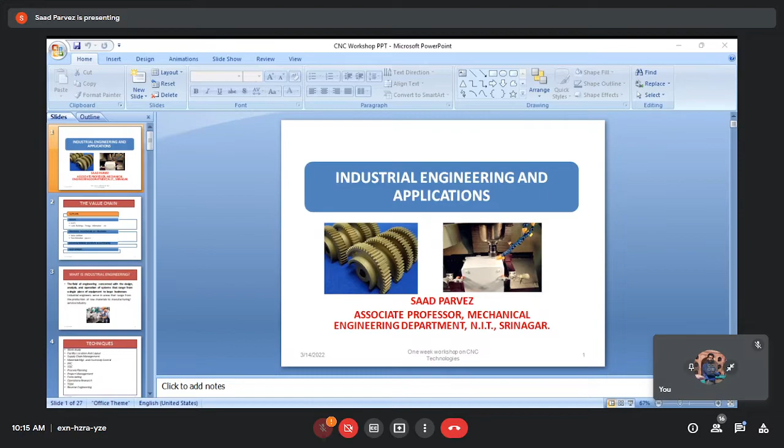More or less, they have an influence on the industry, and industry-institute relationship is very, very important. In India also, now we have found for the last few years that academia cannot survive without an industry, and industrial development, the technological development, the research which generally the students do, it should influence the industry. It should help in building up the technologies which are to be used or which are being used by the industries.

Similarly, CNC machining, when we talk about this technology, it can fix many issues in production that cannot be solved by other processes. I think much has been told about it by the earlier resource people, the experts of the CNC machines.

Usually, precision metal parts are CNC machined, even in the first stage with mold. It will also be machined after molding. So after molding also machining is required, after casting also machining is required. Those of you who have been exposed to industries will find the relevance of machining in manufacturing. It is very prevalent. We cannot talk about producing a product generally without machining it on some machine tools, on some machine facilities. So CNC is the machine which is used throughout the industries in today's era.

Why do we use CNC technology? What is the benefit? The basic answer to that question is, after molding, we have a lot of roughness. So to achieve a smooth finish, to obtain precision, molded metal parts are quite rough. So we need to obtain certain precision values, and CNCs turn out to be one of the best facilities for achieving that, no matter if sand casting molds or die castings are used.

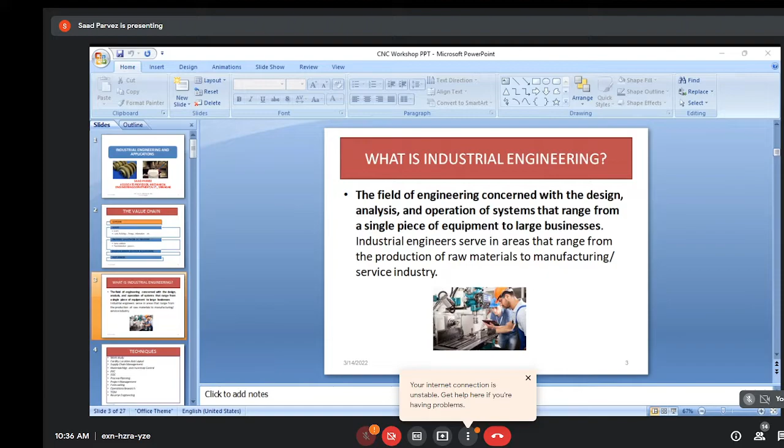These factors affect each other, resulting in CNC machine tools in the production process which cannot completely rely on the workmanship of a person who is working there. So other systems have to play their important role. That's why we talk about industrial engineering.

So what is industrial engineering basically? Industrial engineering is a field of engineering concerned with three important parameters: design, installation, and improvement of man, machine, and materials. It's concerned with the integration of all the resources which we are using in an enterprise, especially the 5 M's or 6 M's, and these resources need to be integrated.

Industrial engineering is an applied science used for the integration of all the resources to manage our businesses. Whether we talk about a small piece of equipment or a large business, there is a role of industrial engineering in cost reduction, number one. Number two is the increase in productivity. Number three is the effective utilization of resources, because resources are scarce. And number four is designing a man-machine system ergonomically. These are the broad four important aspects of industrial engineering.

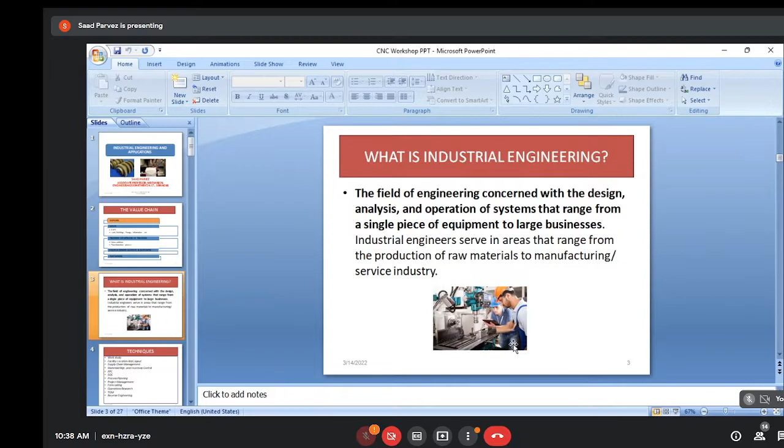Industrial engineers serve in areas ranging from the production of raw materials to manufacturing or to service industry. Now we come to the techniques. There are many techniques nowadays, hundreds of techniques have been developed, and I'm sure those of you who want to carry their research in this industrial and production area would appreciate these techniques, and would come up with extensions of the available techniques or formulation of new techniques.

New techniques are being developed, especially if you look at the Western economies - Japan, China, US, Europe. They are coming up with new techniques every now and then. You find something new has come in the industry, which would actually achieve those four objectives which I've talked about earlier.

So these are some of the techniques - I want my CNC machine to be utilized properly. There are 20 jobs currently being done on my CNC 5-axis DMG Mori machine. I should know what the standard time is, because until I formulate my standard times, I won't be able to determine my cycle time.

If I'm not able to determine my cycle time, I won't know when exactly I'm going to complete a particular job. And if I don't know when I'm going to complete a job, I can't tell my customers when their jobs would be ready. So that's very important - the delivery promises which we make.

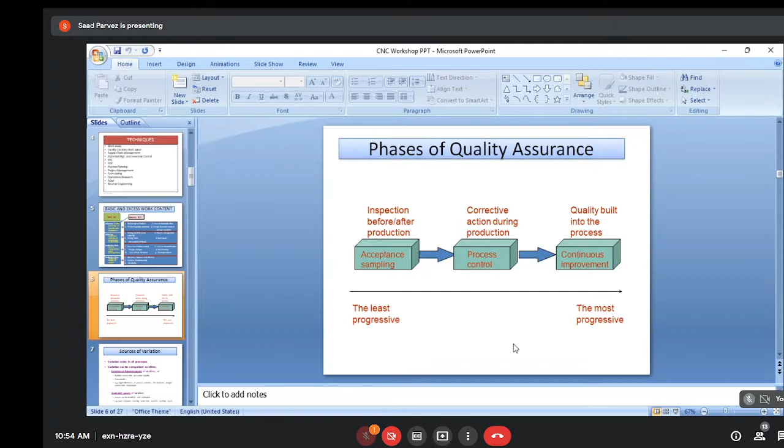The important thing we need to understand now is the source of variation. Suppose Mr. Nadeem is running his machine and has done everything perfectly, but he still finds that if he manufactures 20 parts, there could be variation among all of them. So variation exists in all processes. No technology in the world can produce, say, 100 parts that all give the exact same dimensions—there would always be variations.

Now let me ask you a question: what are the sources of variation? What are the sources of variation?

Who can tell me? Yes. Is Lakshmi Kala there? Oh my God, where is everyone? Yes sir, yes sir, yes sir. Lakshmi, can you tell me what are the sources of variation?

Sir, maybe the dimensions, sir—generally in industry, environmental causes. Okay, good. Systematic errors, like random variations. Random variation, very good. Irfan bin Ashraf—oh sorry, Irfan is a host. Mohammed Rafiq.

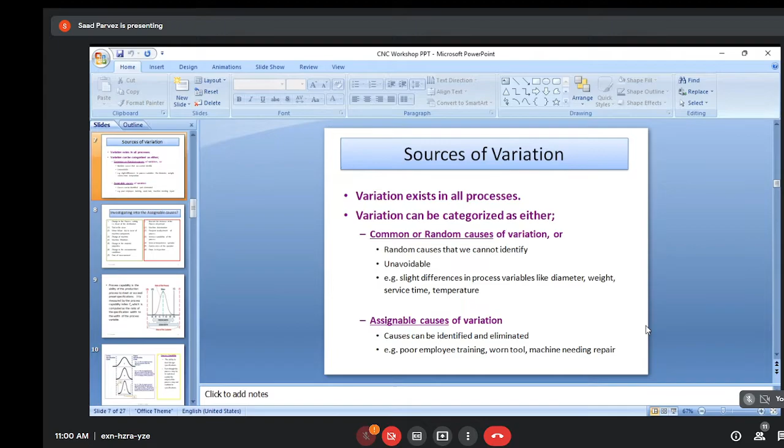As we investigate, we find there could be two reasons. A reason could be, suppose in a sampling data we have calculated the mean position of our samples, and you have also calculated the sigma, the dispersion. The change, the reason for assignable causes, could be that there is a change in the process setting. When we say the process setting has changed, it means that the mean of the distribution has changed. This is number one.

The second reason could be that there's an increase in the process dispersion, the sigma value has increased, not decreased, it has increased. If I ask you a question: if there is a decrease in the process dispersion, what does it mean? Who will answer that question?

Anyone? Within 3 seconds? No one. So the decrease in the process dispersion is a good sign.

It means that our machine's processing, Mr. Nadeem is doing very well, and he has decreased the dispersion, reduced the sigma value significantly, and we are able to produce parts of high quality within the specification ranges.

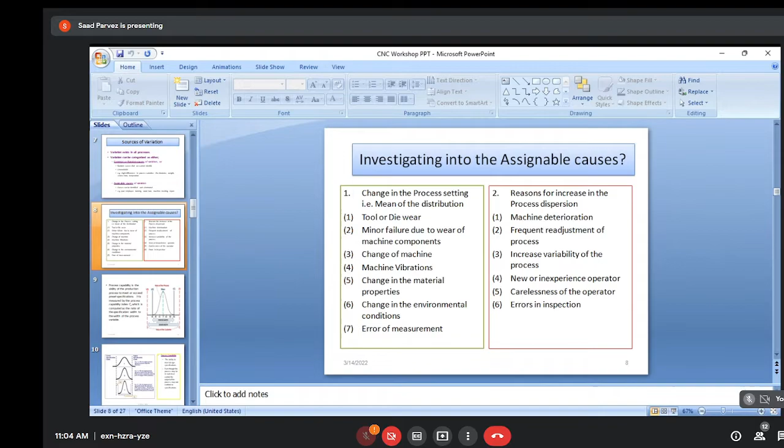So this could also lead to variation, which is important. I will give an example in industries long back when things were not evolved, research was not evolved.

I think it was in the 80s. Perhaps there were 5 or 6 machines which were put on one shop floor. Their proximity was very close, maybe the machines were kept at a distance of hardly a couple of meters.

So when the new machines were installed and the job came on those machines, it was found that one machine's operator was excellent, a very trained operator, but even though every other parameter was correct, the parts he was producing were not up to specification.

So there was a lot of investigation. A lot of engineers came and they brainstormed what could go wrong. The machine maintenance staff was called and everything was checked.

It was found that everything was fine, so why was this happening repeatedly? We were able to see that every time we were producing a new part, the same problems occurred. And then suddenly they found that the next day, the machines which were in the vicinity...

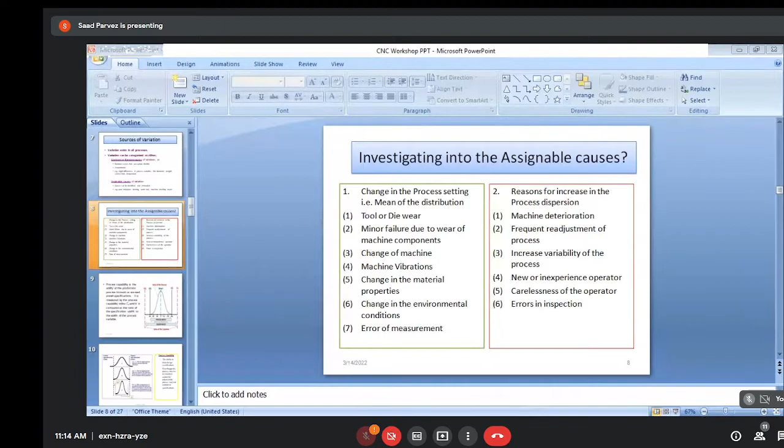Now, the important thing is, as I told you in the example I gave you, we have to ensure that process capabilities are studied for each process. So every process has what we call a process width. As I told you, the process width for most of the general processes is plus minus 3 sigma.

So if you look at the sample reports being generated, say for example a sample of 20 parts are being inspected randomly, and we obtain a mean value and a standard deviation. Plus minus 3 sigma gives me a process width, which lies between two limits, the upper control limit and the lower control limit.

Now once the design width is greater than the process width, there could be a possibility the designer has given tolerances, or the width of the two limits, the upper limit and lower limit, in such a way that it has crossed the plus minus 3 sigma. The specification limits given by the designer are shown by the red line here, the lower specification limit and the upper specification limit.

So what would happen? This study is very, very important. I cannot tell Engineer Nadeem that you produce a part with an accuracy of 3 microns or 4 microns, because I told you on day one that the accuracy of my machine is 6 microns.

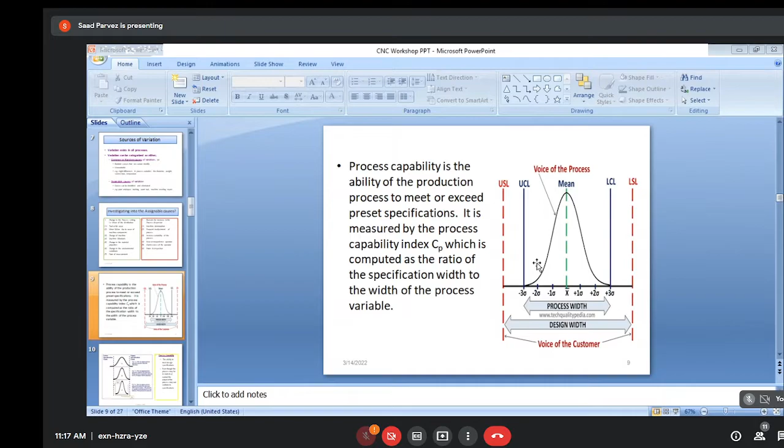Generally there are some capability indices. I'm sure you must have done this in your earlier degrees, in your BTech - we have the process capability index, which we call CP. It is computed as the ratio of the specification width to the width of the process. If I'm able to calculate this ratio, I would be able to find those values, and based upon the value, determine whether this machine is capable or not capable. Those are the studies.

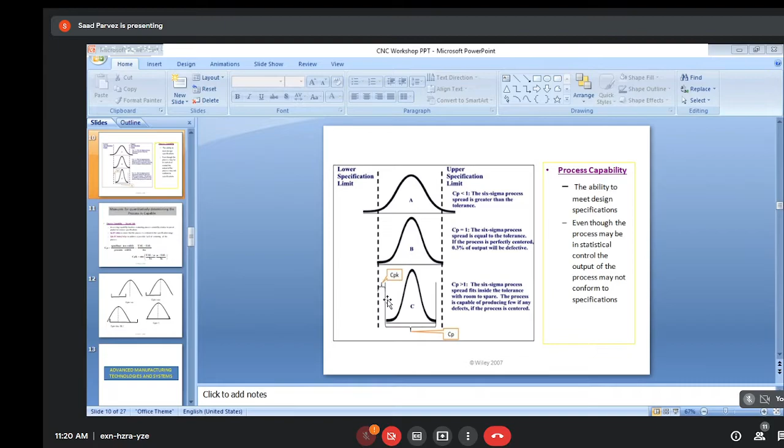Now, but again, I have to engineer, Nadeem has to center my process to the CP value. So the CPK, there is another index which we call CPK, is that area where we are producing some bad parts. This is how exactly CP and CPK is calculated. We call CP the process capability ratio, whereas CPK is the process capability index.

So these two are very, very important for any engineer, any CNC operator. The designer, the design engineer and the production engineer, they have to come together and sit and find what my CNC machine's CP value and CPK value are. Based upon the values of these indexes, I would make a decision whether I would run this part or operation on my 5-axis CNC machine, or use some other process to run my machines. So these are what we call the process capabilities.

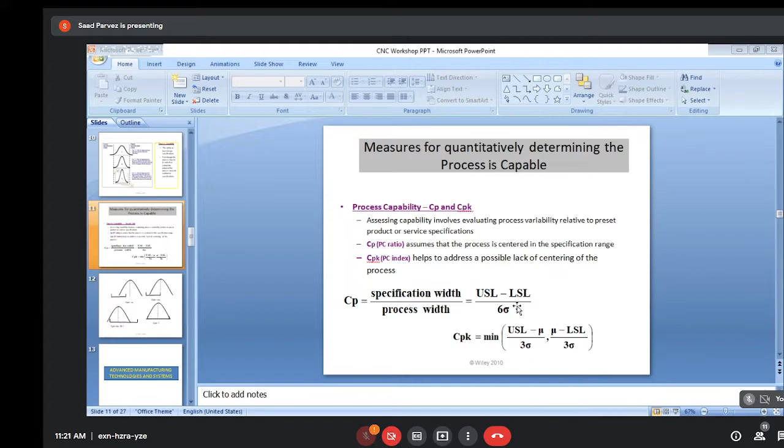So this is how exactly I have explained the four things which can happen: CPK is 0, it's 1, or it's negative. Now very quickly, in another 5 minutes I would give you some of the important advanced manufacturing technologies and systems which you are using.

Well, most of you would be familiar with this concept, which we call the just-in-time concept.

It's a Japanese concept and a very, very important concept in industries, where I would ensure that all parts are produced on time, whatever time is limited. The reason is that this is also called the zero inventory concept. Just in time is divided into two parts: the JIT purchase systems and the JIT manufacturing systems.

It's well connected. The other day we were talking about flexible manufacturing systems, FMS systems. In FMS, we use technologies not only for production but also for material handling, inspections, and so forth. Since these are well connected from the onset to the last activity, we have to ensure that not a single process in the supply chain gets disturbed or overburdened.

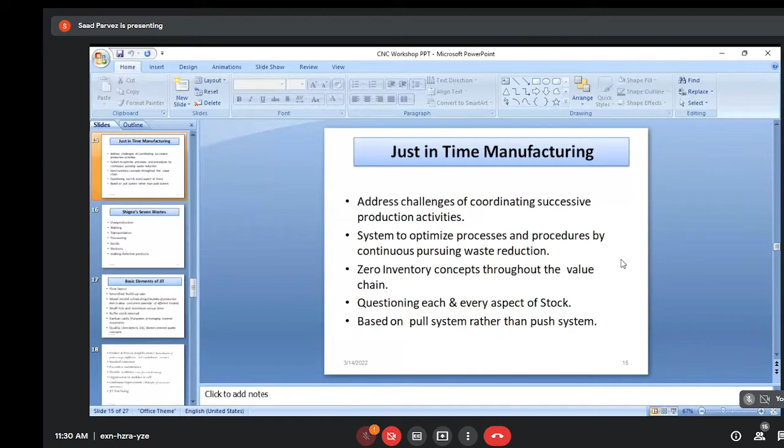But now when we talk about having too much variety, changing customer tastes, and innovations - we try to innovate new products, and then based upon those innovations, we try to push those technologies, products, and services into the market. But for that, you should have a strong marketing team. So that's very important, that generally in manufacturing, pull technologies, the pull systems, would really help to minimize the cycle time and get better profits.

So the basic JIT systems, I would just skip it, you can read it on your own. Then the last thing which I'm going to talk about is computer aided process planning. This is one system, computer aided process planning, where a lot of things are being done.

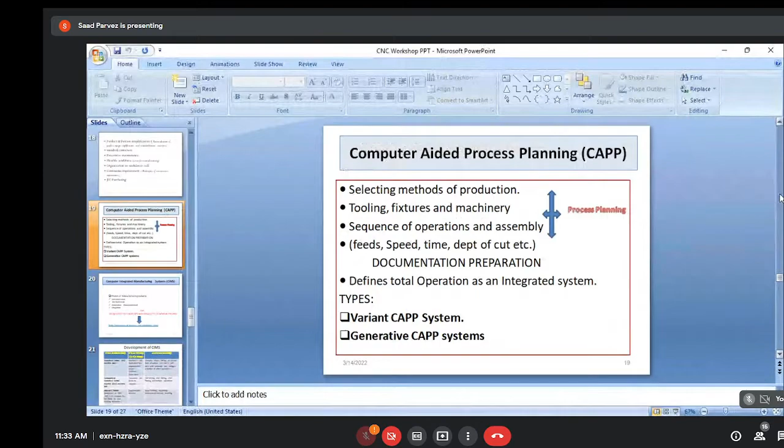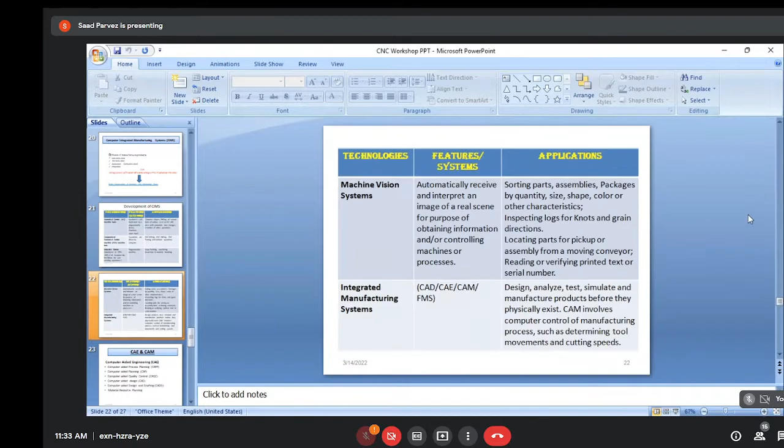I think I should stop here. There were some important points, I would share this slide with you now. What was the development of the CIMS? What are the technologies which we are using in current industries? What are their features and applications? So we know something about computer-aided engineering and computer-aided manufacturing.

So what are the various ingredients to these? Like we have computer-aided process planning, computer-aided planning, then quality control is all computerized. So look how exactly things have evolved, and nowadays nothing comes without software. Whatever industrial activities there are, you have some sort of software, all computer-based. That's why CNC technology is all computer. We are not in Industry 1 or Industry 2, this is Industry 4. Industry 4 is the cyber industry.

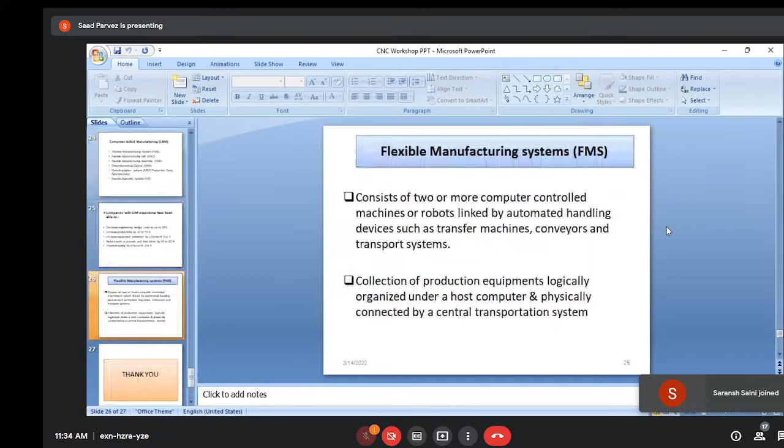Now we are using cyber systems. Industry 3 was computerization, but now it's all internet, the Internet of Things, IoT, artificial intelligence, big data. Everything is managed with the help of those techniques. So CAD-CAM engineering is an important ingredient of CNC, where we have a lot of systems relating to computers.